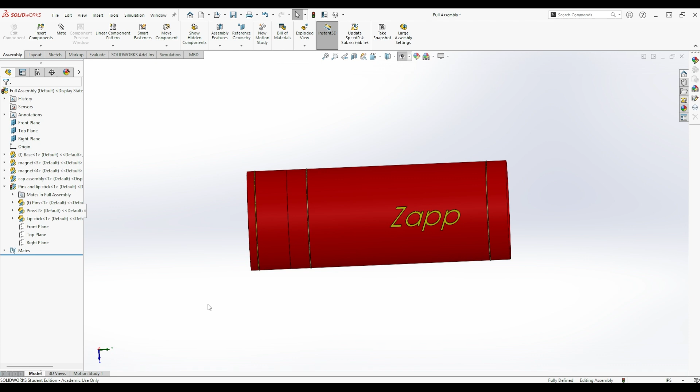So this is a lipstick taser from the movie Despicable Me. I'll go through and explain how to make this, and I modeled it all out, and we got a little lipstick here. So enjoy.

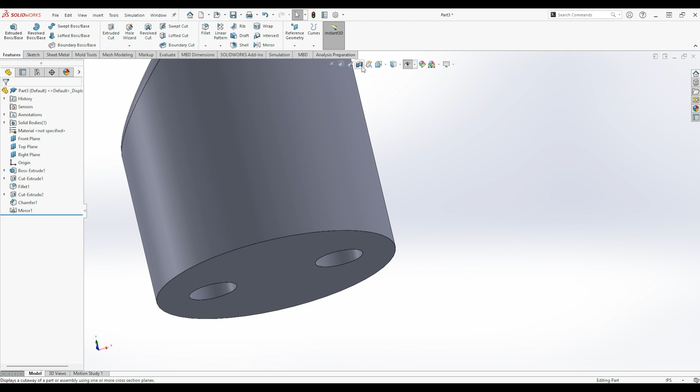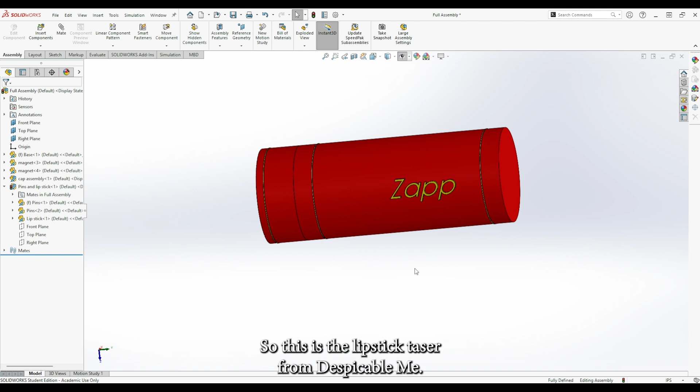So this is the Lipstick Taser from Despicable Me. And you see it says Zapp. That's actually from the movie. I wanted to make it as closely related as I could. So I did. Here's a little overview of it.

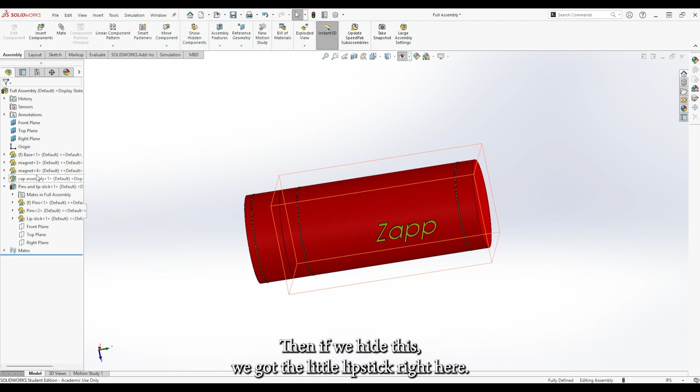I'll give you a little rundown. So we got the whole case right here. Then if we hide this, then we got the little lipstick right here. And then, whoop, got the lipstick coming out with the two little prongs. If we hide this, then there, boom. And these shoot out, separate, and zap the person.

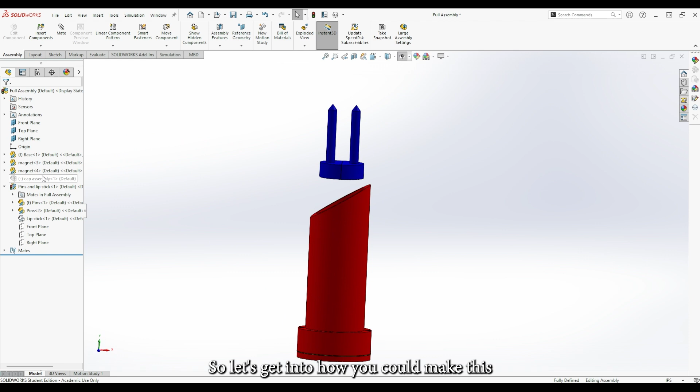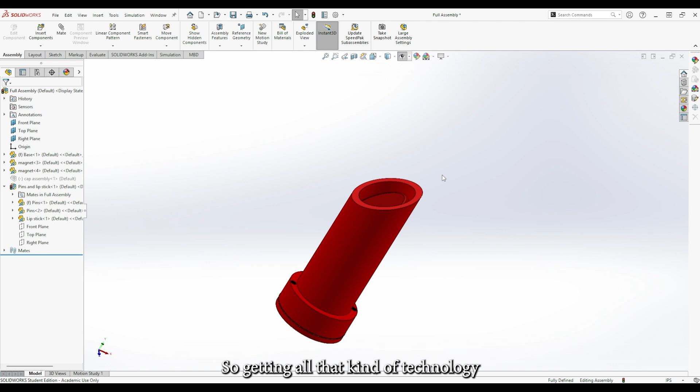So let's get into how you could make this. The first problem is tasers are normally very large. They are handheld, the same kind of look as a normal gun. So getting all that kind of technology into this small lipstick device is a bit of a challenge.

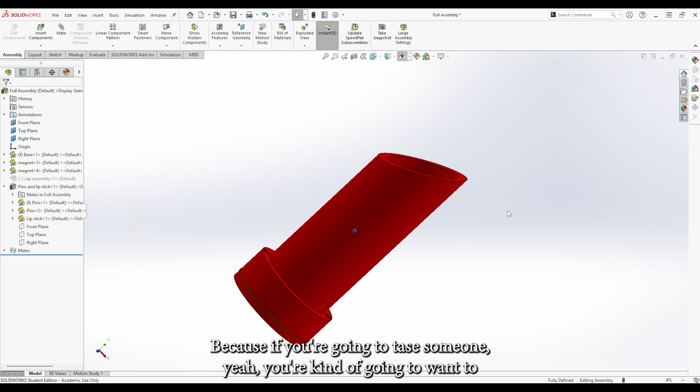But if you're going to do it, I'll let you know how. First off, you're going to need a lithium ion battery, and it's got to have a lot of power to it. Because if you're going to tase someone, it depends on how much you want to do. A taser normally zaps them, and you get a lot of voltage going through you. You just can't get too much or they could die. So for this, you probably need about 50,000 volts.

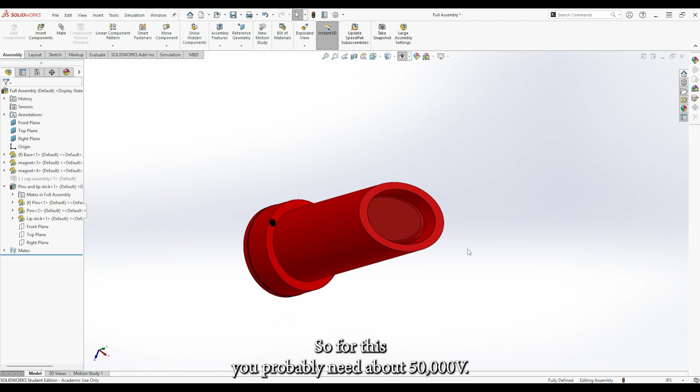So it won't kill them. It'll just give them a good old stun, and they'll fall down and not harm you or get in your way.

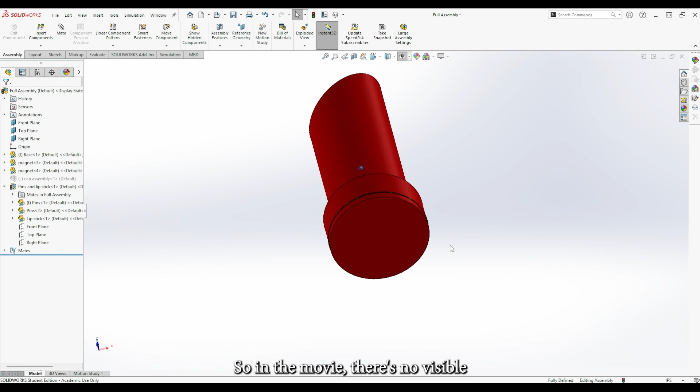So the next problem is shooting it. In the movie, there's no visible spots to show how they would shoot it. I don't know if there was a button on the bottom because there's nothing around the edges. So I don't really know how you would do that.

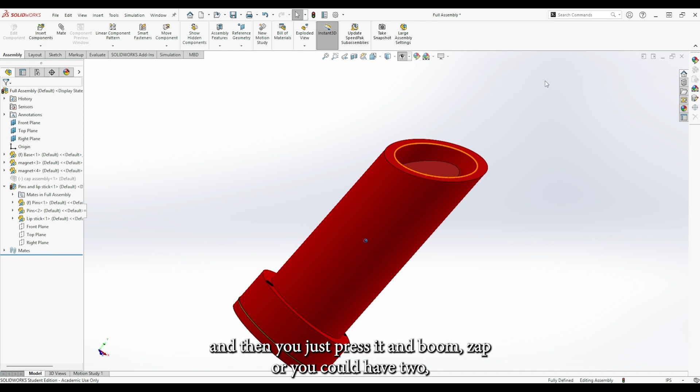A couple ways you could do it: once you take this off, there could be a little button that pops out and then you just press it and boom, zap. Or you could have two concave spots that once you pinch them together, it could shoot it out as well. You also could have a little button on the bottom to shoot that out as well.

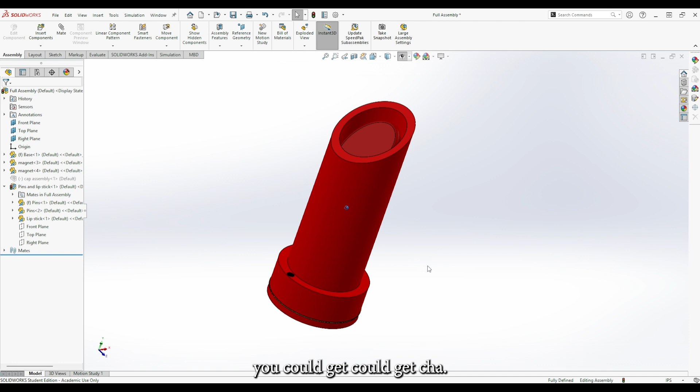The only problem is if you have it in your pocket and it shoots, it could get you. But I also added these little magnets right there and right there to kind of prevent that from happening. We're gonna open this. I put two little magnets on the bottom of this as well so that they would magnetize together and hopefully not accidentally fall off in your pocket, because that'd be very unfortunate.

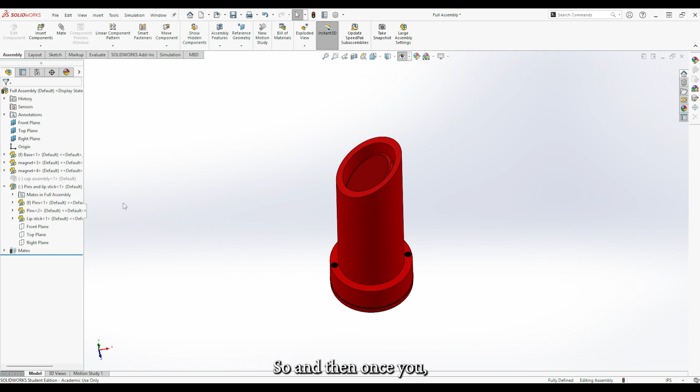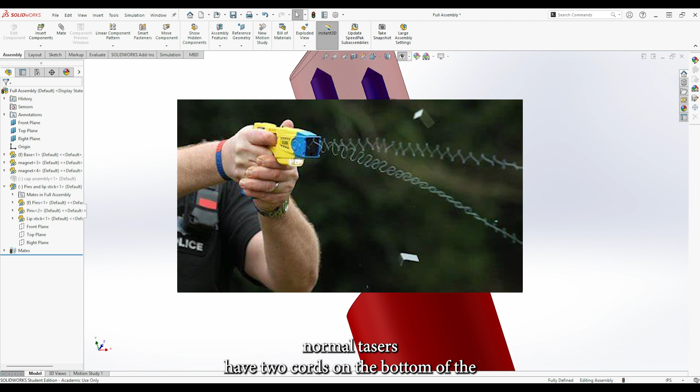So once you get all that figured out, then you just have to connect it to these two prongs. I wasn't gonna model all the electricals, but you have to have a long enough cord, because the normal tasers have two cords on the bottom of the little pins that shoot out and get them. So you have to have enough wire on the inside of this that when you shoot it, it can make it 10, 12 feet. So you don't have to be right up next to the person, and you can get them from semi far away if they are approaching or attacking you or something like that.

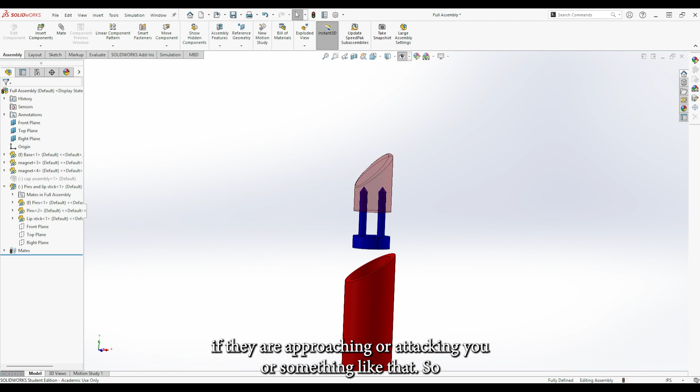The other thing you could add, I'm debating if this is something I should do, you could have it where... so we're going to actually just hide this bad boy. You could have it where these are attachments.

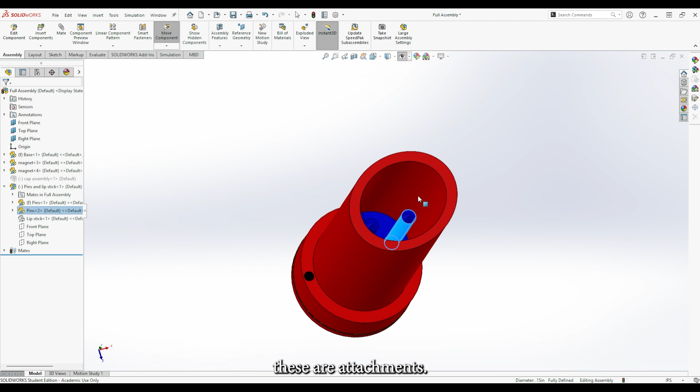Well, let me get this back. This is a full attachment. This may or may not be real lipstick, but the point is, if you put it in here, you can just replace this whole part.

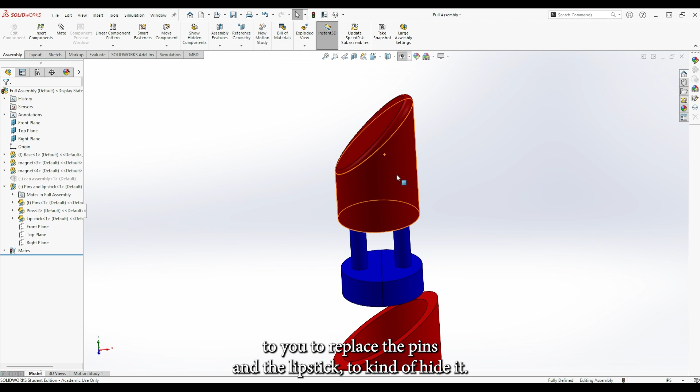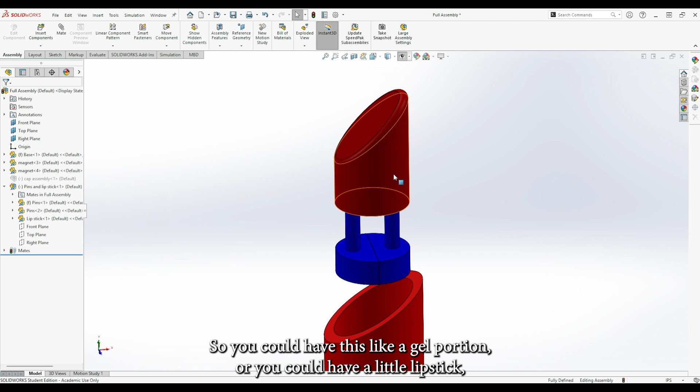Normal taser guns have two little prongs that shoot out, and you pull off the attachment. So you still have the taser, but just a close-up taser once you take the cap off. You could have a gel portion, or literal lipstick. Once you shoot it, you pull these out, replace this whole part, put it back in, and boom, you got a reload. That'd be kind of cool.

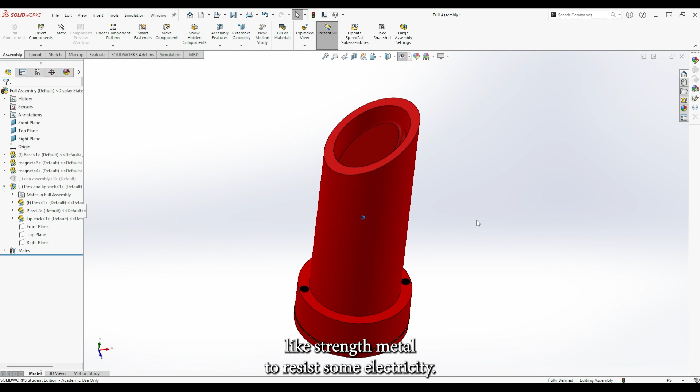The thing is, you gotta make it sturdy, so you're gonna need to use a metal casing. Luckily, most lipsticks do have metal casing, it's just not high strength metal to resist electricity. So it's gonna have to be metal, because if the battery gets too hot or the cords hit this, you don't want it to melt and ruin your lipstick taser.

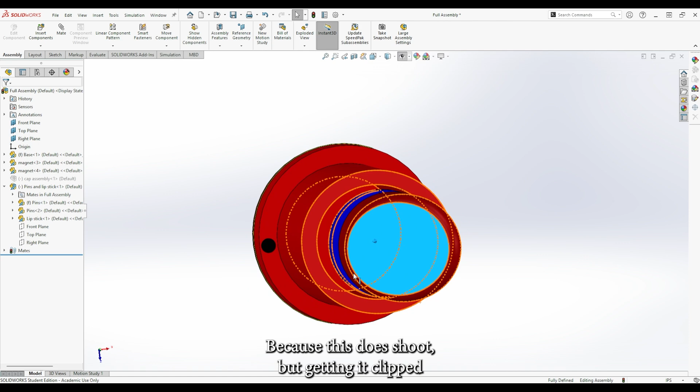The other thing you need is to secure this on the inside, because this does shoot, and getting it clipped in every time is something you have to make sure you do. You could have brackets, or something like a gun where it has little clips on the inside. That way you press the button, the clips go away, and it shoots out with a spring.

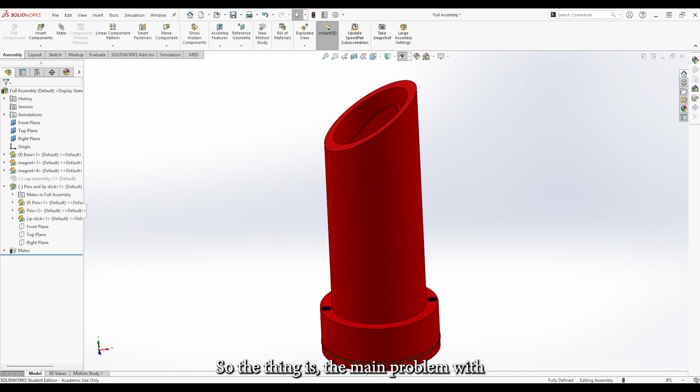Or you might need to use some CO2. The main problem with this is the miniaturization of all the parts, since it's such a small device. Also, getting it to shoot out.

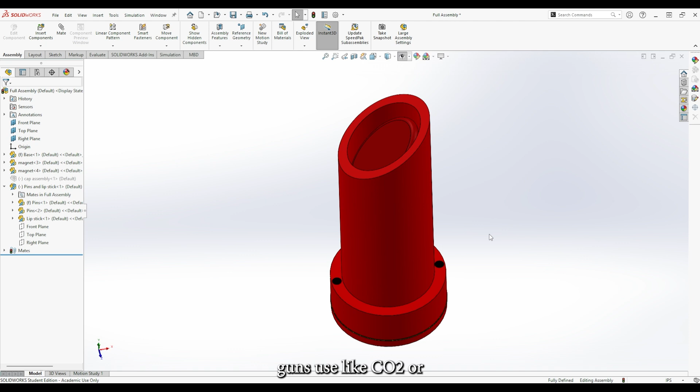Prongs in taser guns use CO2 or an electrical charge, I'm not sure what it's called exactly, but CO2 would be the main thing. Like paintball guns, that's how they're shot, and it shoots it out.

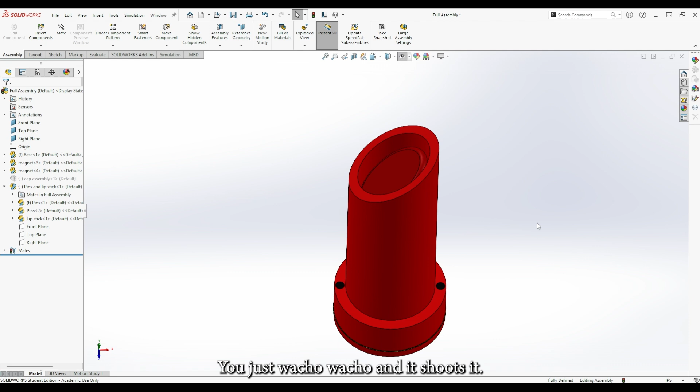This, you would need some type of mechanism to shoot it. So whether that's CO2 or a different type, you gotta be able to shoot it out and get the person. The thing is, it's definitely feasible.

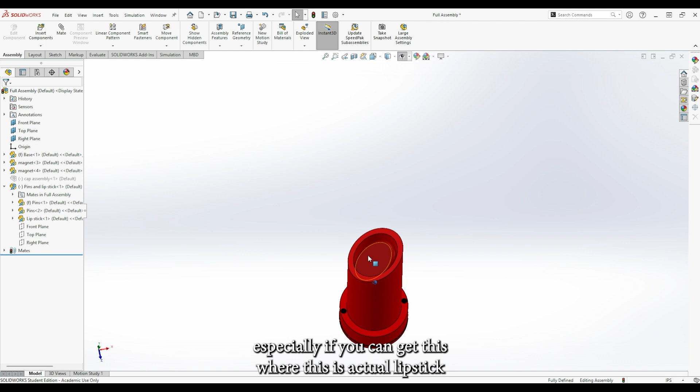It definitely could happen, and it might help save some people in a time of crisis. Especially if you can get this where it's actual lipstick, and someone's talking to you, you don't like them, you're scared they're gonna attack you. You pull out the lipstick, start putting some on, they attack you, you get them.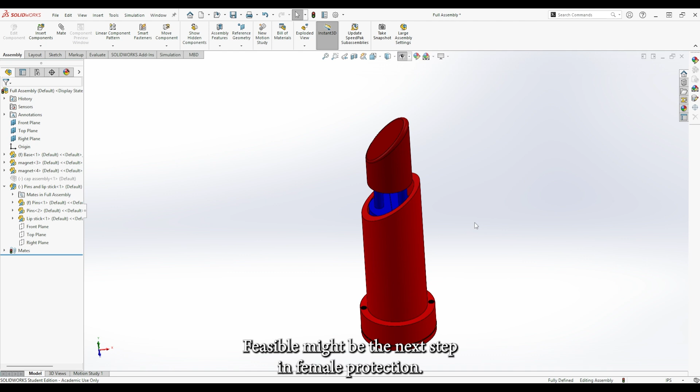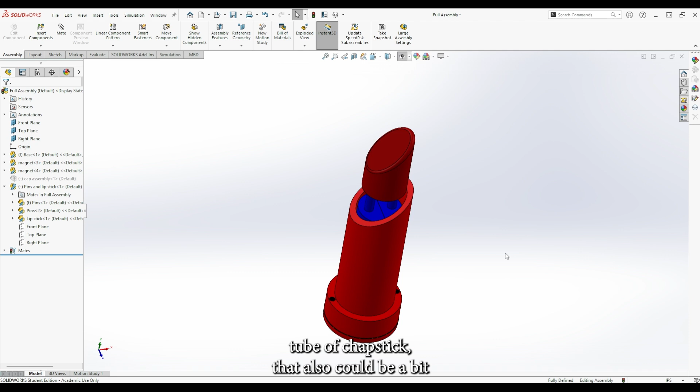So possible, feasible, might be the next step in female protection. Why do I say female protection? Men don't normally carry around lipstick. You could also use chapstick, except chapstick's way smaller than lipstick. If you're carrying around a giant tube of chapstick, that could be a bit suspicious and something bad might happen.

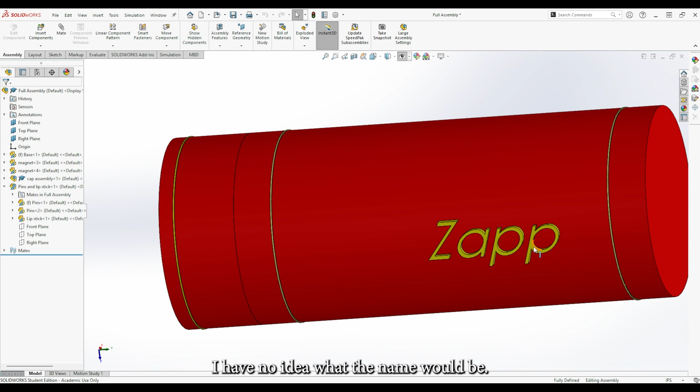You never know. But lipstick taser, possible, feasible, definitely could do it. And you could give it a cool name. I have no idea what the name would be. Probably can't use Zapp, because that's from a movie, but it could be possible. So I think this could work.